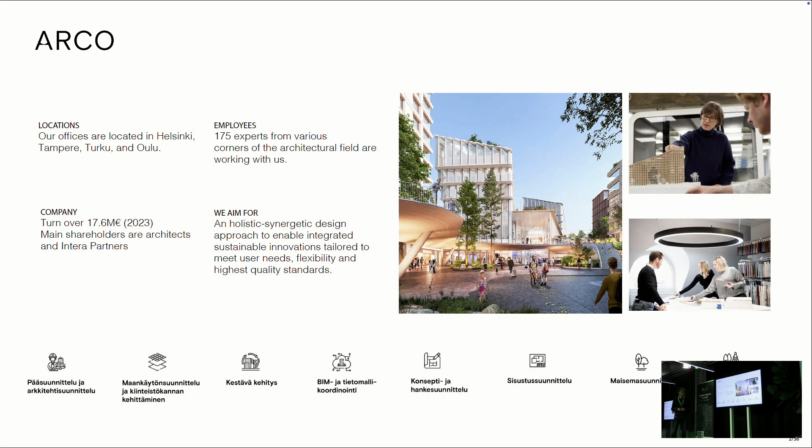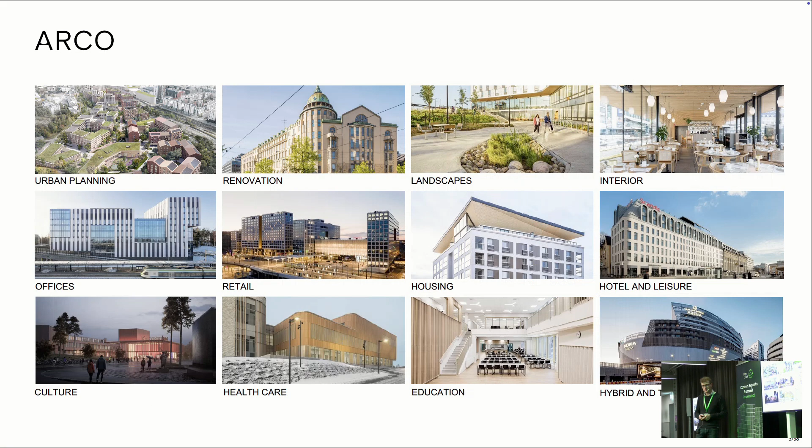I'm originally from Germany, that's why I'm sorry for not yet being so great at standing here doing the speech in Finnish. But I'm leading the sustainability development team at ARCO, and also the international division. If you see the project range the company is doing, there's hardly anything left out. Because of that, if you're so large and handling so many cases, you should also be quite responsible, and you should turn maybe faster than a small firm can to all these new demands we have on the table today.

We know that the construction business is a huge emitter. We are using 50% of all the raw materials we excavate on the planet, that's quite a lot. And we are responsible for 35% of the waste put on the planet. So we should feel a little bit guilty.

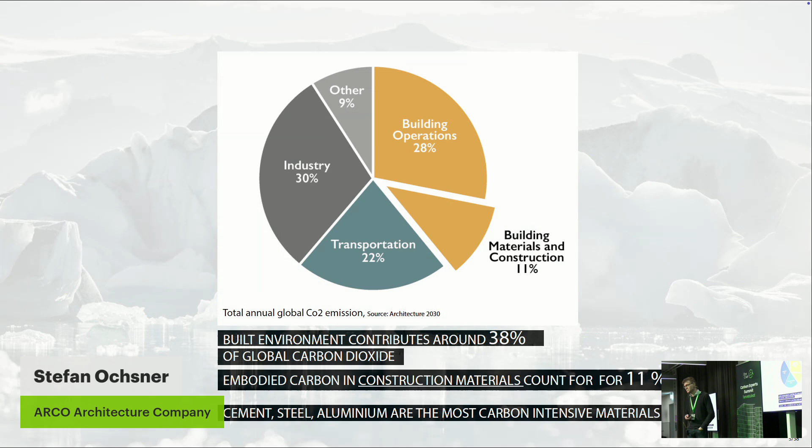But on the other hand, we have great opportunities to make things better. So we should understand where we are in the system, where we are in the problem-making things, and understand that we really have to move. We really can't wait anymore. And we can't let those frightening graphs we see on the screen grow anymore.

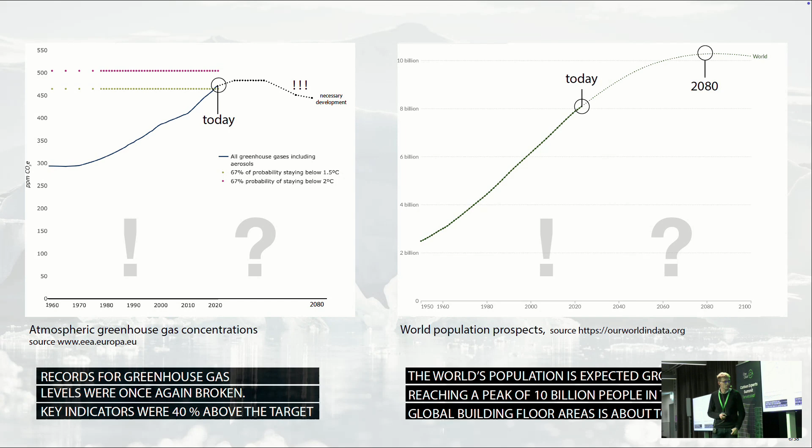So how can we actually do that? We know we have to construct more, we can't just stop building, but we also understand we can't continue as we have been doing until now. We know we can't emit the same way as we have been doing in the past. I'm a little bit naive probably, but I think the problem we have here is man-made, and therefore humans should also be the ones that can fix it.

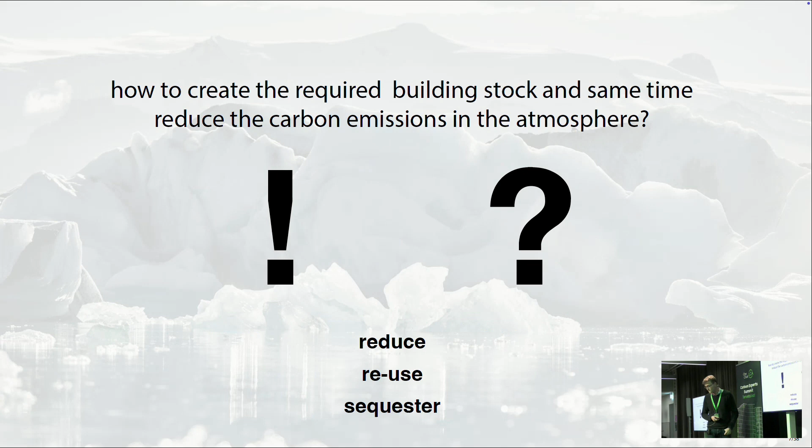And 3 terms down here on this slide show how we can fix it. I know it's not that simple, it's very complex, but in principle, you can fix it by reducing, reusing as much as you can, and sequestering - taking care that the carbon emitted doesn't reach the atmosphere.

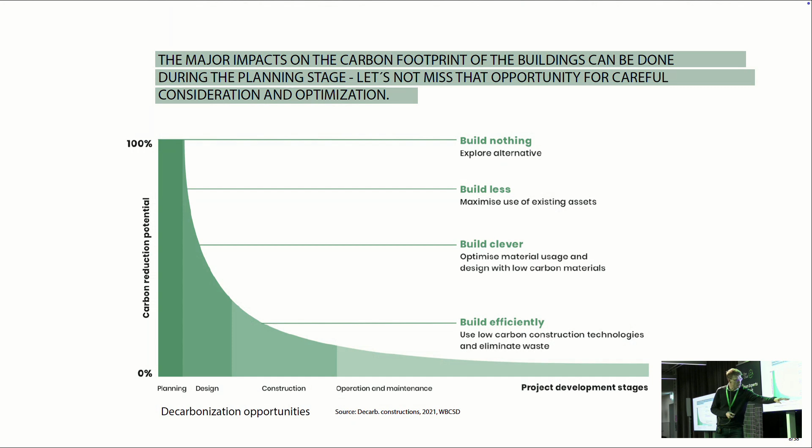Sounds easy, but it's not that easy. First of all, we have to understand where we can make the biggest impact, not going into depth. I know we don't have much time, but just want to point out, beginning of the project, very, very early, that's the place where the big change can be done, where you decide, do you actually build or you don't build? Do you use the existing stock, or do you build actually smaller than everybody's expecting? And only then, later on in the process, all this optimization, all the clever materials, all the technology can really make the difference.

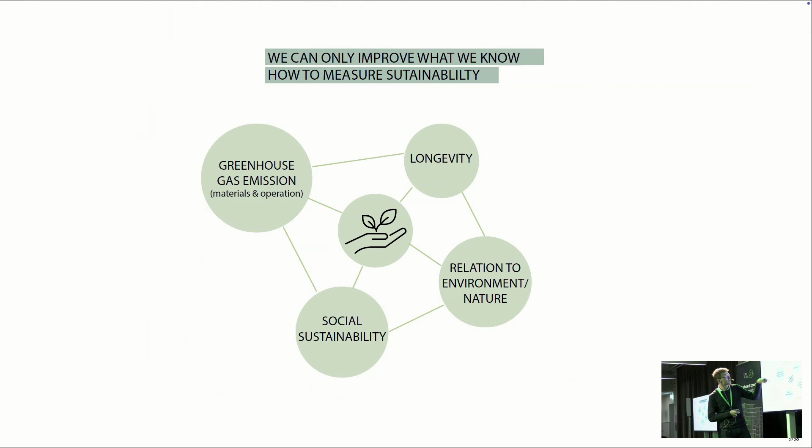At ARCO, we have been asking ourselves in the last years, when we were starting the sustainability group and we understood we have to do a little bit more than just the classical architecture, we wanted to specify ourselves what is really a sustainable project or a sustainable building. And today we have been discussing a lot about this big bubble here, the greenhouse gas emissions, material and operation, everything included, but we also need to remember that there is much more than that. It's about how long the building lasts, how the buildings are in relation to the nature, and how social sustainability can be understood, the relation between the society and the city and the buildings.

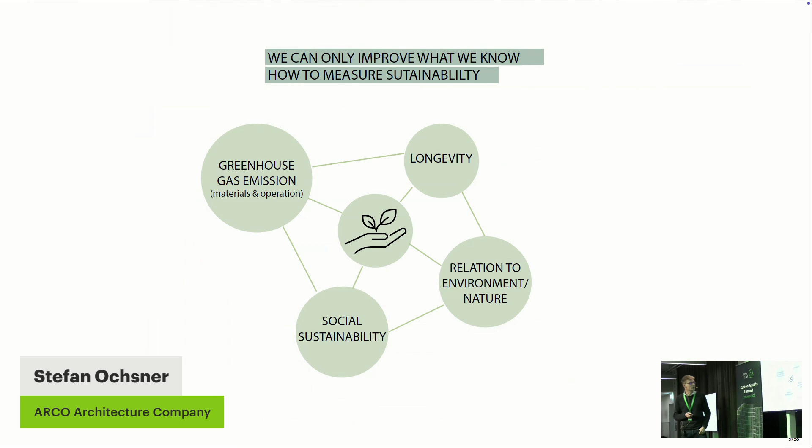But for me, this sentence is quite important. What we want to improve, we have to understand first, or we can only improve what we know. And that led the sustainability team in ARCO, which started pretty much in 2020, to the point where we are now. We have been doing a lot of collaboration with software developers. We have been doing a lot with One Click LCA, with other software and tools, of course. And we have been discussing with a lot of collaboration firms in order to be one day ready to really make sustainable buildings. And not only every 10th building should be like this, every building should be like that.

And since the title of the speech was how to change the design process, the method, I've been trying to collect here the ingredients we need for making things a bit more sustainable. And we think that there are 5 big ingredients. One is that also the architect has to be really active in steering the carbon emissions, meaning doing the calculations. Reuse and circularity has to be taught much, much more than it is today. Efficiency in terms of space use and in terms of energy is one thing. Biodiversity is the other thing. And then the last one, Panu mentioned it in the entrance talk already. Many things can be done in terms of checking our impact on the environment with analytical tools.

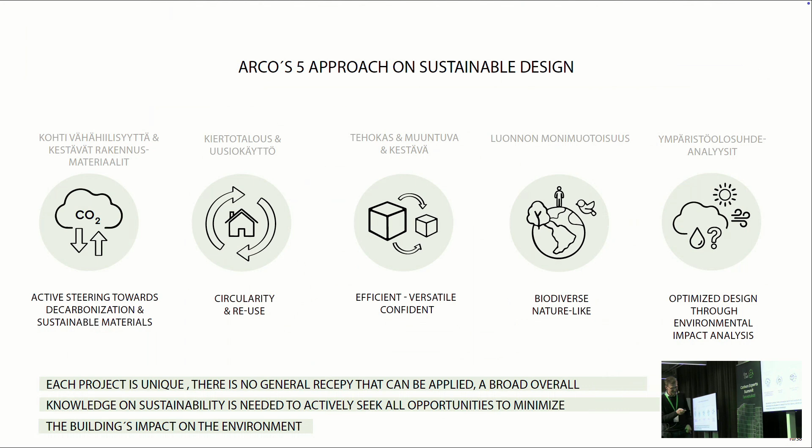Let's use them. I'm not going much into this theory. I have some slides that show buildings at the end. But let's go quickly through these 5 ingredients before I switch to explaining how these have been used at the building level. So what do I mean when I'm saying the architect should be active in steering towards decarbonization? I know we have special consultants and they can do the calculations probably more precisely than us. But we feel that if we are not understanding where the carbon is located in our buildings, we can't make them really better. We can't just always wait until somebody tells us what to do. We have to get the feeling ourselves.

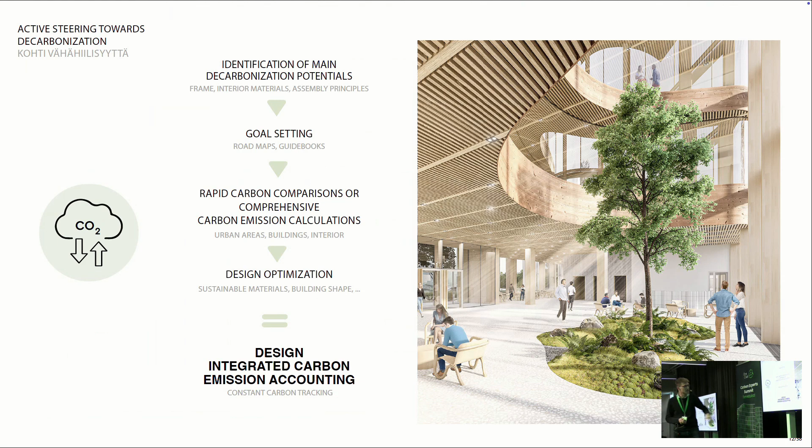So we want to sit at the table at the very beginning. We want to identify the decarbonization potentials with the clients and with the builders, make the guidebook, make the roadmap. And then I think this is maybe something I want to point out, especially: we think the right tool would be to make a lot of rapid carbon comparisons during the design phase, not only at the beginning and at the end, to have the entire design phase totally connected to carbon emission calculations. Whenever you have to make a design decision, you should know what it means. And therefore, we think that the architects have to be skilled to do the calculations, to get that integrated carbon emission accounting goal.

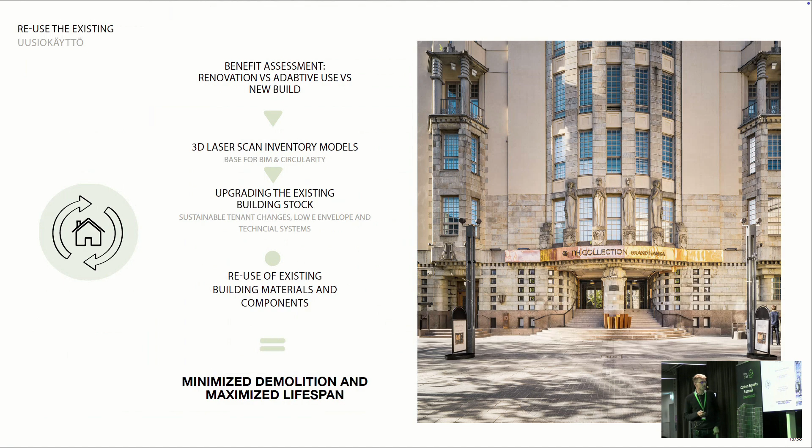Using the existing: of course, renovation will be on our schedule much more than it is today. A lot can be learned from these old buildings. A lot of new tools are needed to make these constructions more smooth, all with the motivation: let's minimize the demolition to the absolute and maximize the lifespan of the buildings.

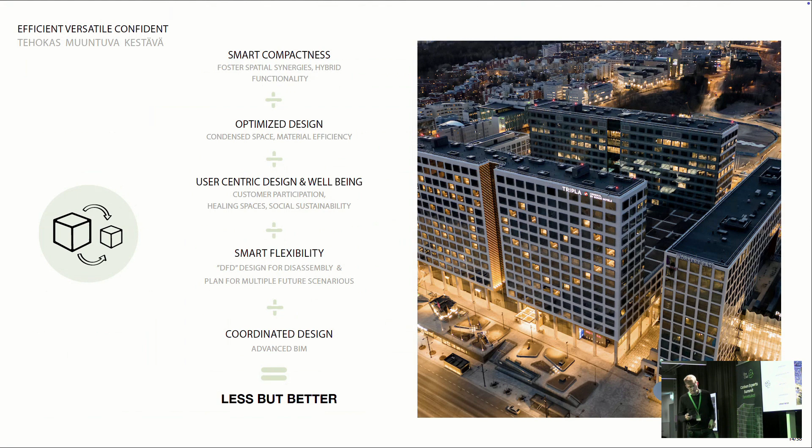This one is maybe my favorite, has also the most difficult title, efficient, versatile, confident, probably a little bit too much. But what I want to say is, let's try to create buildings that are smaller than they were in the past, but smarter than they were in the past. Let's try to put in a little bit more functionality, a little bit more flexibility, a little bit more optimized, and just let's build less but better and save carbon by that.

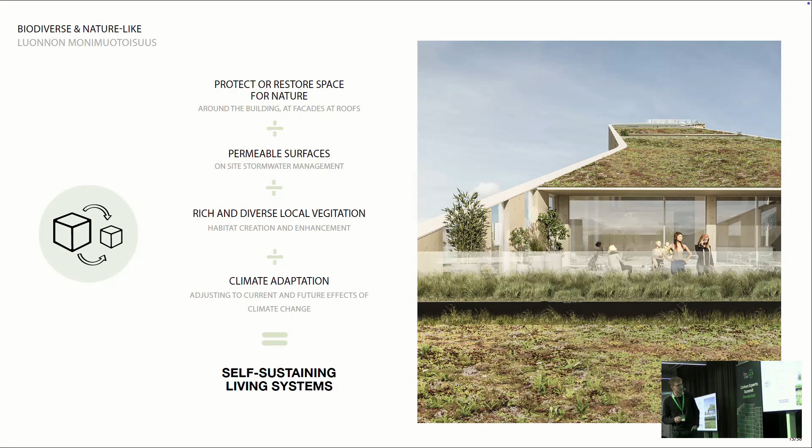When it comes to nature, we know, unfortunately, we are killing a lot of nature. We are killing a lot of biodiversity. Let's be much better on bringing that back when we put buildings on the ground. There will be more coming later.

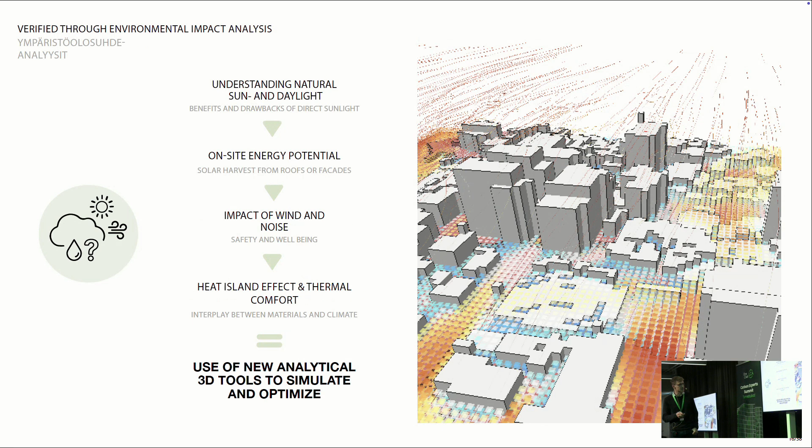And then the last ingredient is, let's not wait until the high-rise or the mid-rise comes up in the urban landscape. Let's check the impacts of it before. And that refers to thermal, wind, noise, humidity, anything can be almost simulated nowadays. And the architect should use those tools to be really sure that what they do has a positive impact and not a negative one. So let's do some examples, still good in time.

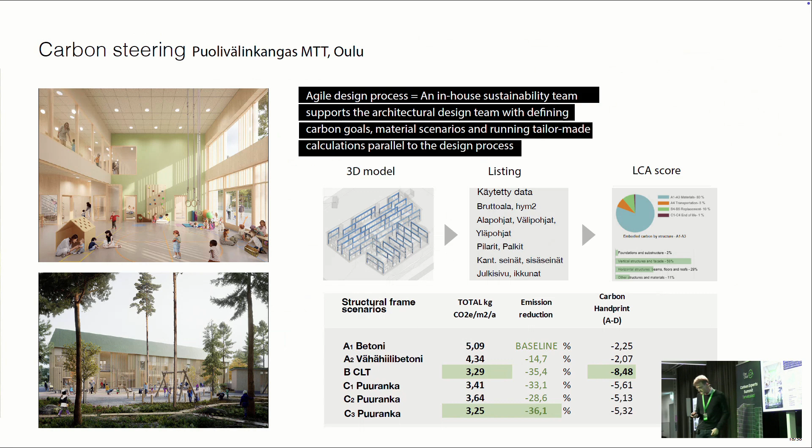I'm going in the same way through the ingredients, as first a few examples where we have been training ourselves to do carbon steering in the past, and then I'm going through every one of the 5 ingredients and show you some examples. So carbon steering starts in the architectural office very often when you do a competition. We have now set up the workflow in ARCO like this, that the sustainability team will support the competition teams very, very often, and we help them to build up scenarios, options, and do the baseline calculation and find out what kind of decarbonization level you can reach with certain solutions. And this is the start of the project.

That was an Oulu competition. This is the end of the project. This is Lyyra in Helsinki. Maybe some of you know that new building quarter close to Hakaniemi. And there we were trying, can we actually, as the architect who is managing a lot of data on a BIM level, on an IFC level, can we do similar things for the emissions?

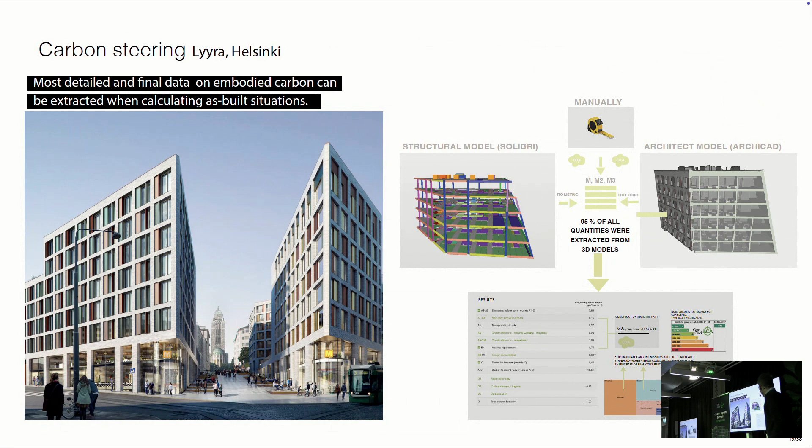Can we pull in the information from the structural model, from the architectural model, from the manufacturing side, from the client, and do the as-built calculation? We were training and checking how much time, how much effort, what kind of workflow has to be built up for one part of the Lyyra project, for the housing part. And we managed to get 95% of all the quantities from the 3D information and using One Click LCA, as in almost all our projects.

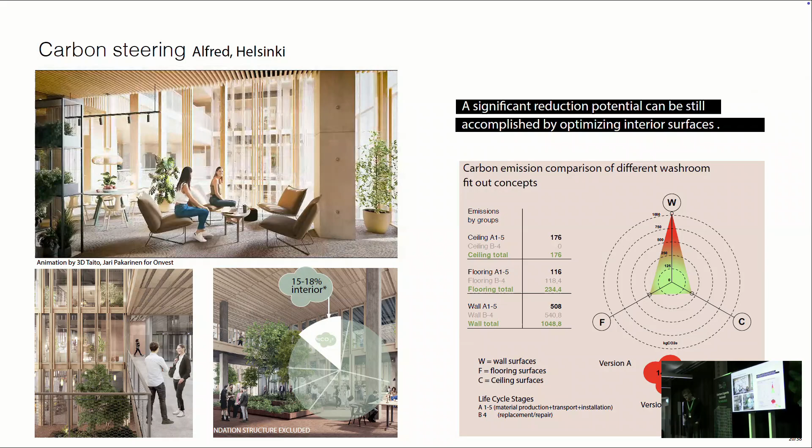This is a project that shows the reality quite well. It's a very ambitious client. We are building an office building in Vallila at the moment, but the decision on what kind of structural frame is used is very often pushed really far in the process. So we didn't want to give up doing decarbonization strategies just because we know that the biggest emitter, the frame, isn't decided. So we were going down in the hierarchy list, and we noticed that the interior surfaces in such an office building would count 15 to 18%, foundations not included in that calculation.

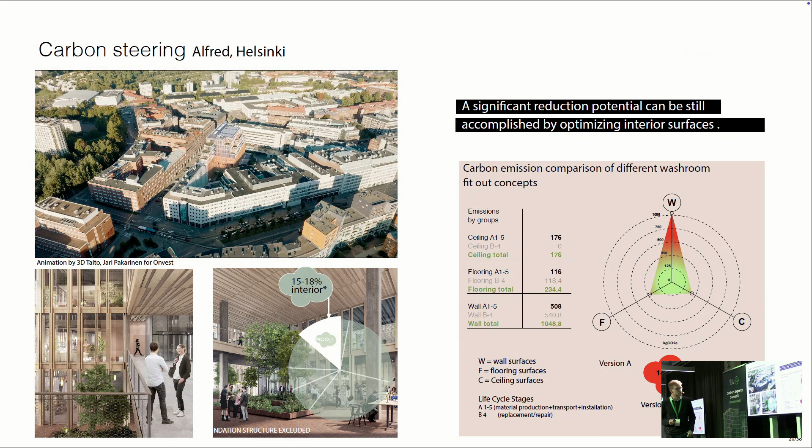And then together with the interior architects, we were doing different versions of customer spaces, toilet spaces, looking at floors, walls, and ceiling, and you see the cloud of the emissions, how much you can push it down if you try hard, and you can still have a very interesting interior design.

How do we do that? Probably as many of you who are doing the calculations, we're using One Click LCA in the center. We're using ArchiCAD, Revit, Solibri to feed in the data. We're using the rule sets. Very grateful that One Click LCA offers that all. We're using the EPDs or the generic ones that come from the One Click LCA database.

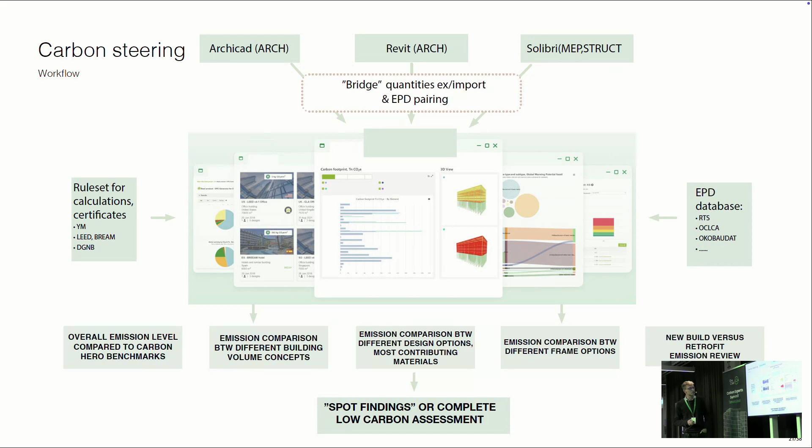And we can do actually quite many different small calculations or comprehensive ones, comparing different building volumes, comparing the frames, comparing material setups, facades, slab systems by ourselves, and trying to get the feeling how well the building behaves in terms of emissions, or how stupid decisions we sometimes make just because we like very much how it looks.

If I go to the second ingredient, mastering the circularity, it's a little bit a different approach than what we heard in the Tampere case. I'm not going into using the tiny bits of materials, but we think that we are lucky that we can learn from these great historical buildings.

We have been renovating these 3 hotels in Helsinki, and we have to really get ready for the future where in 2040, probably 2/3 of all the building stock is already there. And we can now learn from these lighthouses, because in the future we have to be much more creative, because they will not always be so interesting, the buildings that will be renovated.

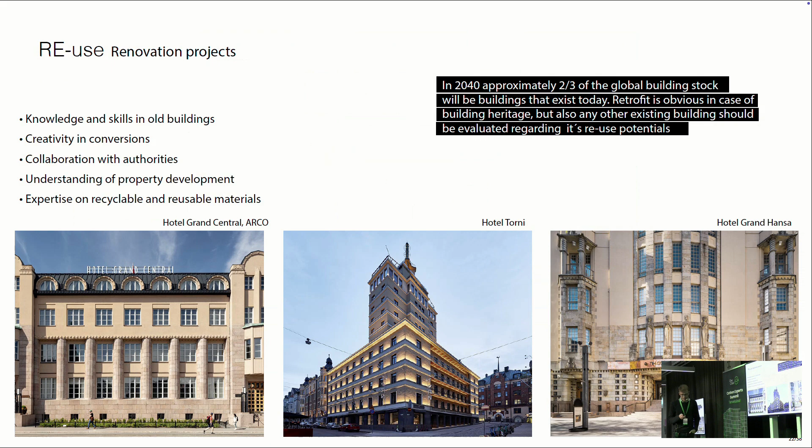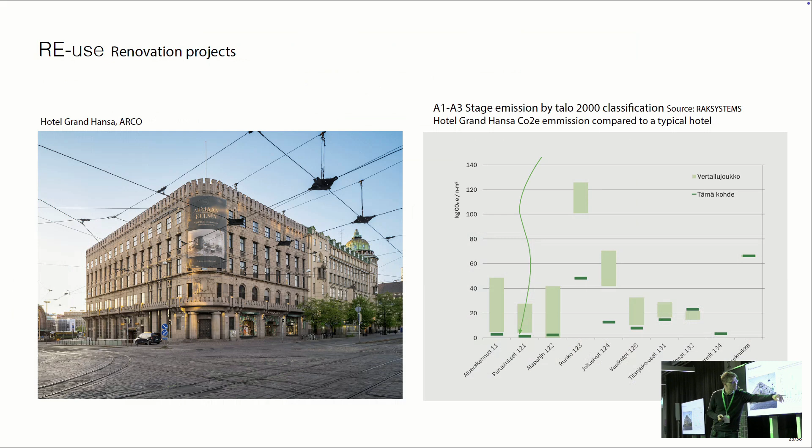We know that the emissions are always much lower. This is not a calculation from us. It has been done by the sustainability consultant, but everybody knows that in the emission level, there is no way that you can beat a reuse project versus a new project.

An interesting project from Doha, where the client was asking us to do a comparison between demolishing an existing high-rise, which was not very successful, was actually never taken into use, or can we actually do something to it to give it a new skin? Together with Ramboll, we were developing a system adding a belt around the existing core, creating a new shape and creating a new functionality of the building.

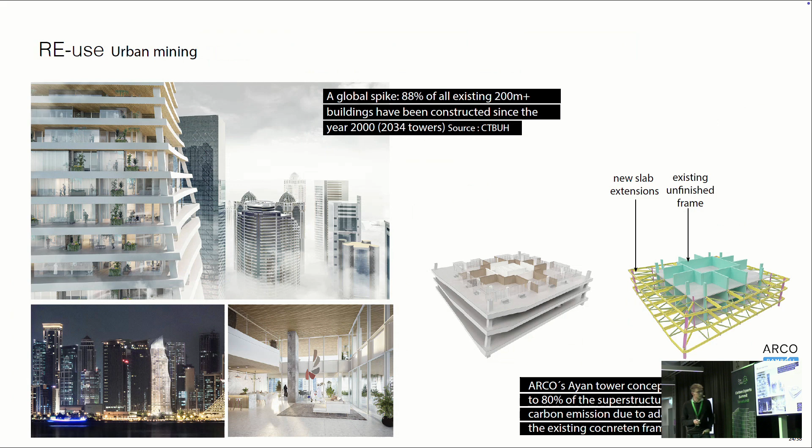And this type of urban mining is just one example to use the materials that you have available in the city already. 80% saving according to some preliminary calculations. The motivation that a building will be demolished or not is not always on the architectural side, but I think if we have fantastic tools available, and we do have them available, we can still motivate many clients to take the step and to renovate rather than to demolish too early.

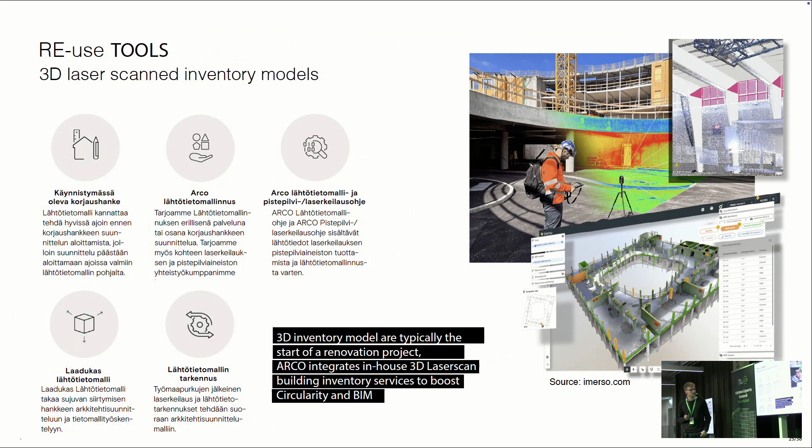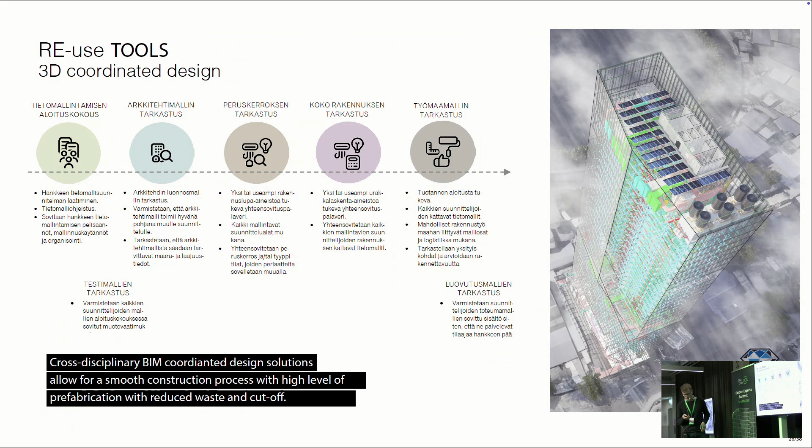Nowadays, we're doing in-house 3D laser scan and photography inventory models ourselves and kicking in the BIM level already at a very early stage. We all know that BIM has a lot of sustainability benefits, less waste, less mistakes, much better collaboration. So let's use it also in the reuse projects very early on, and that inventory model is one of the important things.

The efficiency and the versatility. Is it possible to build the same as what you have been building before on a smaller footprint? Is it possible to meet a demand from a client to increase by 1,100 students or 18% without building new? Our Tampere and Turku ARCO branch has shown that it's possible with a very different design method, with a very participatory design process. A lot of data collection has been done, a lot of client communication or user-centric communication has been done, and many of these campus projects actually survive without adding new functions, just by finding new synergies between the different functionalities.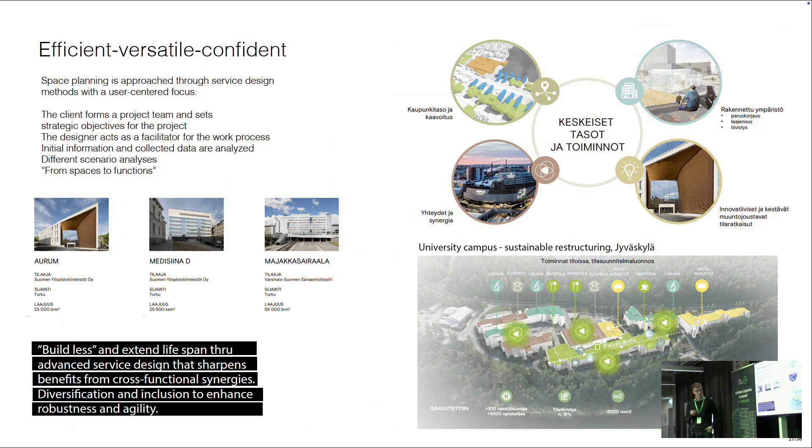And things like this can also be used for new constructions, just to be much more smart in terms of operation and much more space efficient. We believe that in the future, new building typologies are needed. This is a parking house pilot that we've been doing together with Ramboll as well, and the parking house operator, where we were envisioning to build now a 5-story parking house, which we all know will not be needed in 10 years, maybe in 8 years, to that extent. So we wanted to plan it already from the beginning for multiple scenarios.

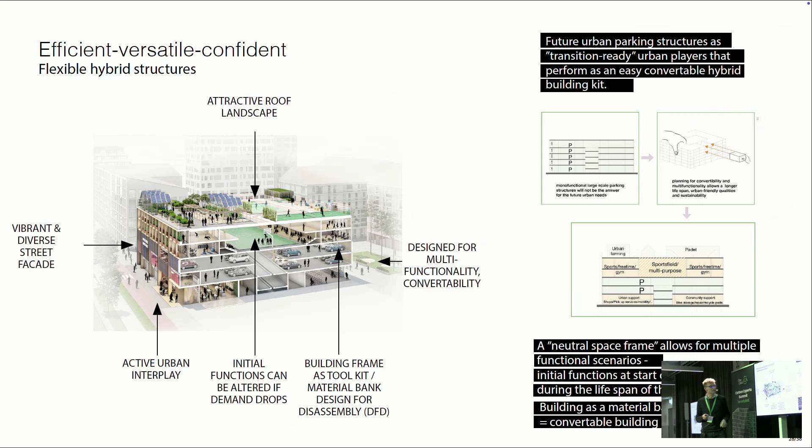And I think that is a kind of exemplary case for many other building typologies. I think we should never plan anymore just for one function. We should assume changes to come, and the building should be ready for that. And in this building, we have been envisioning changing part of the parking floors to sports facilities, to housing, to community spaces, and seeing the building really as a toolbox, as a material bank, and trying to develop together with Ramboll the connections in the structural elements to be reversible, agile, so that the building would last longer than 50 years.

In the housing sector, we all know this is all done. You don't make a floor plan anymore that is only good for one scenario. And also in the facade design, this is a facade of Tripla in Pasila. The design for disassembly, easy maintenance, easy changing in the background should be considered.

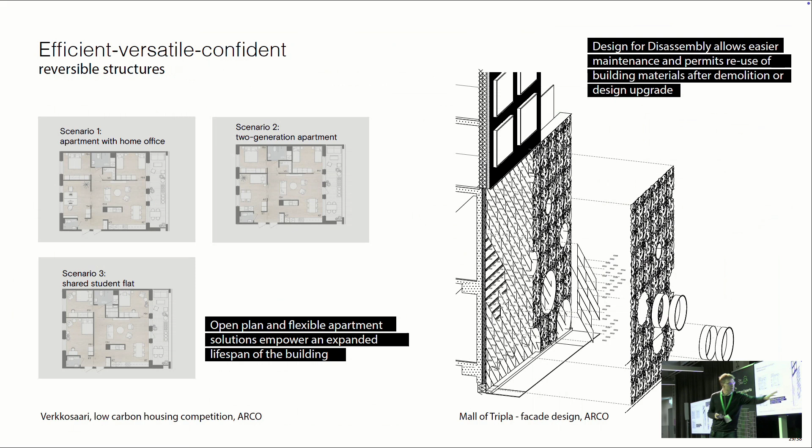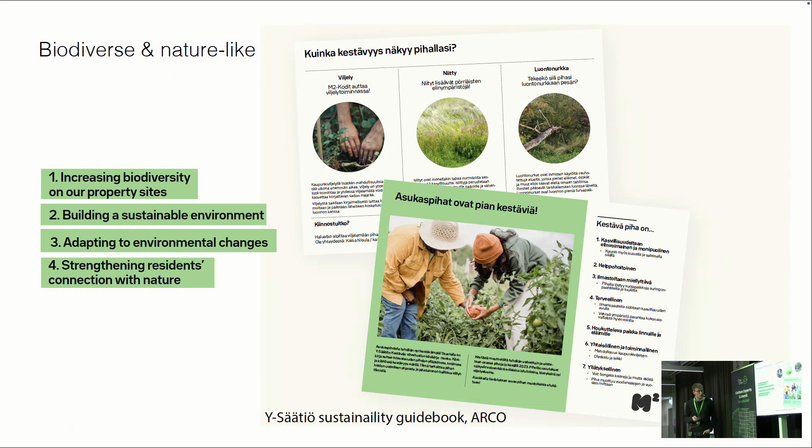The big potential in these big firms like ARCO is that you have a lot of experts in-house, which you don't always have. So we have landscape architects and ecologists in our office, and we're trying to boost this biodiversity, learn from them, work together with them on many projects, and create these kinds of sustainability guidebooks for tenants or for clients, in this case Y-Säätiö, more and more, and promote the idea that we really need living systems. We don't need artificial green spaces.

We need living systems like real nature, and we have to bring back as much as possible of them to our sites. And the courtyards are not enough. We have to go on the roofs, on the facades, and have to use every single surface we find to bring enough biodiversity back.

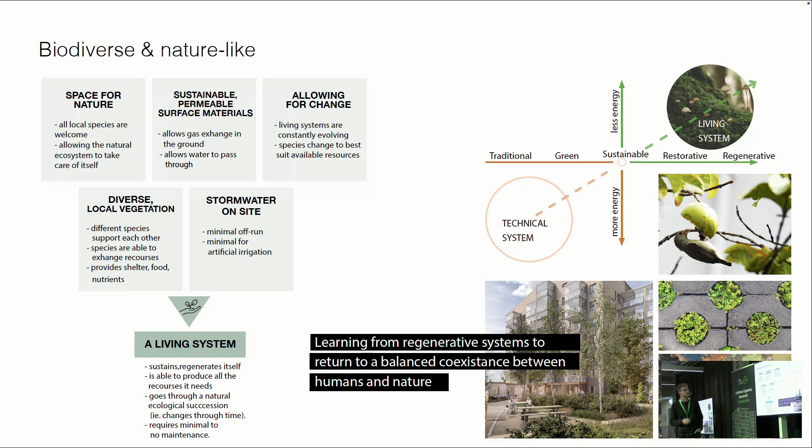The last ingredient is the environmental analysis. And as we saw already in the announcement, One Click LCA is now joined with ENVI-met. This is one example of this. We started using environmental analysis with different software early on. I think that project is already 5 years old. And it's a good example of how a building shape can actually be influenced by data or by environmental analysis results if you're open for it.

We have been developing many building volumes for that specific site in Malmi for student housing, and we ran all of these 10 totally different volume options through environmental analysis, checking the daylight in the courtyard, the daylight on the facade, the noise pollution, because it's in a really noisy spot.

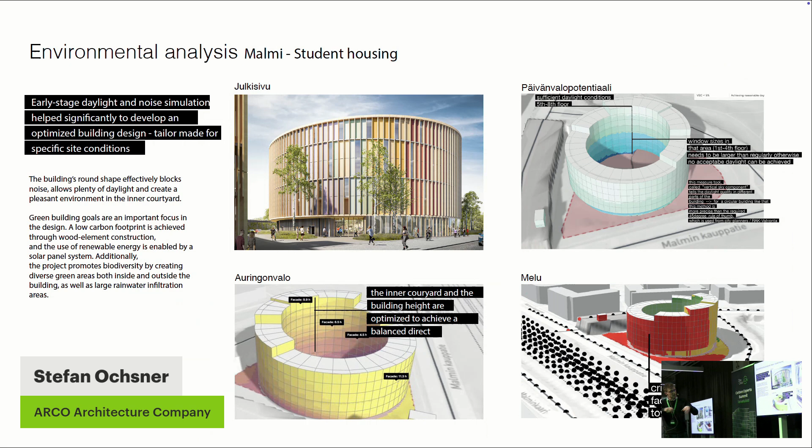And at the end, the winner of the analysis was a circular building where all the windows of the student homes face inwards towards the courtyard, which is wide enough and has a big opening to the sky. It has a sloping roof to catch more daylight, and it has these thick walls to block against the noise.

Similar tools were used to build in a very different climate region. This is Asia, this is Dhaka in Bangladesh. We are constructing at the moment a 138-meter tall high-rise there. And the client was very keen from the very beginning to have a lot of pocket gardens, a lot of green roofs, to bring a lot of green onto the building.

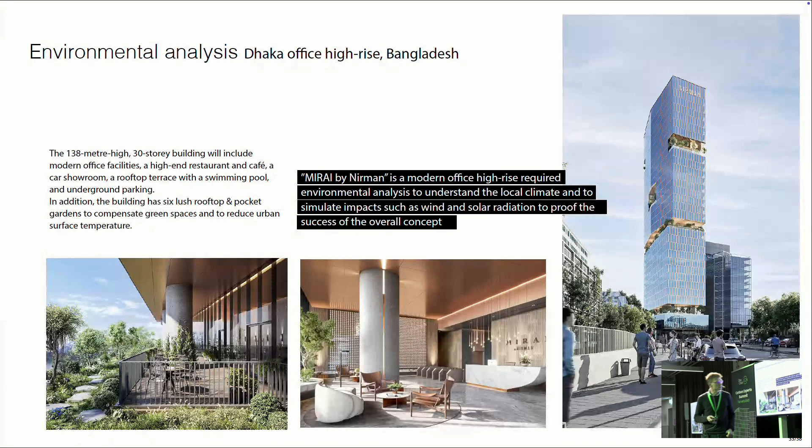And we wanted to be sure from day one that, first of all, the building aerodynamics work in a smart way, but also that all these spaces we create are not just decoration, that they're really safe to use and really comfortable to use. So with this environmental analysis, you can actually do that. You can forecast 20 years, 10 years. These buildings take quite long to build, and check the local microclimate. How comfortable will these spots be? Or will they be just a decorational add-on that is using carbon emissions but doesn't bring any benefits?

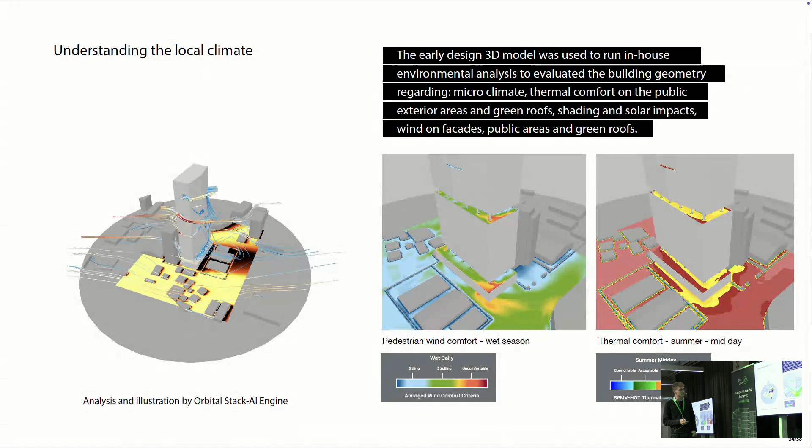This was done with a different software. Nowadays, we are heavily learning ENVI-met, which Panu was already promoting at the beginning of the session, which gives us much more insight, which is much more customizable, where you can decide if you want to work on a master plan level or zoom in to a tiny courtyard or an entrance area, and you can really simulate the thermal comfort, the wind, how well the plants will grow in that condition, how much of an impact a green wall or a green roof has on the microclimate.

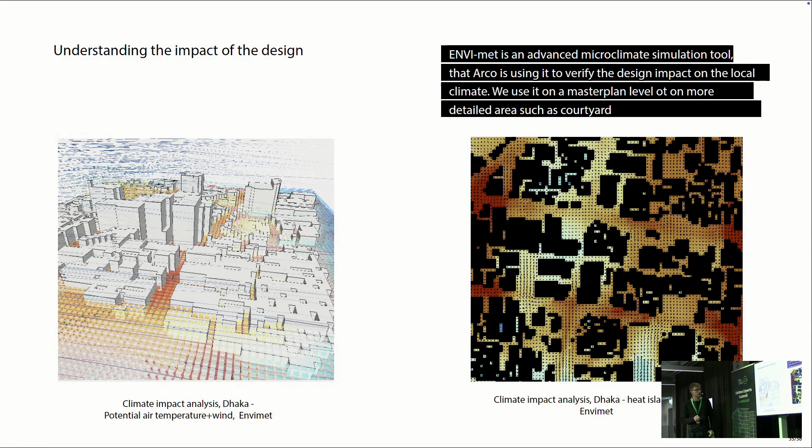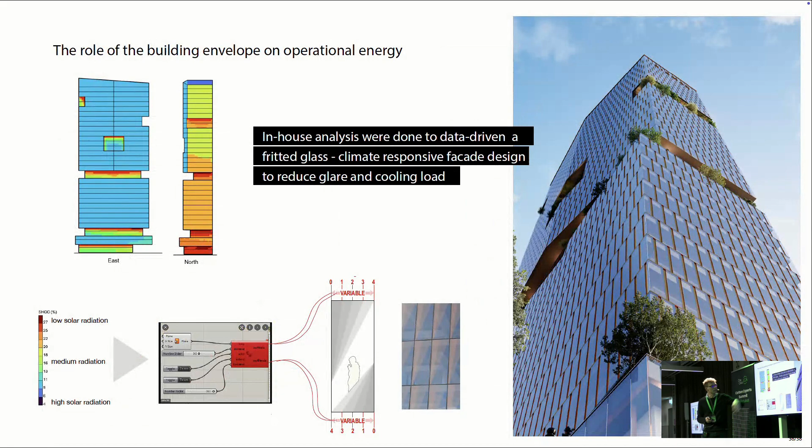And you have, let's say, the scientific proof of it. It's not just the feeling or the intuition of the architect, it's scientifically proven. So this is a huge motivation for us to check projects not only in hot climates like Bangladesh, but to use that also on the Finnish level. A lot of tools have been developed earlier for creating climate responsive facades, understanding the solar values on different parts of the facades, and then creating the right glazing for the right spots. And many more things should be done, but there are limits.

But the last slides I wanted to show you are of a project that is at the moment in construction, which combines a lot of these thoughts and a lot of these new ideas, new tools, widened processes, not thinking as the architect only about the stability, the function, and the beauty anymore, but widening the range of tasks we have. And this is Keilaniemi in Espoo. I think it's for sure Finland's tallest timber office building. When it was designed, it was also the tallest one in the Nordics.

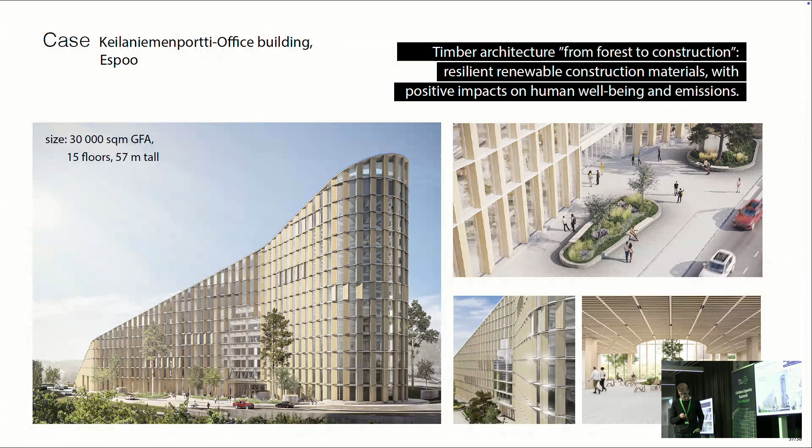Almost fully made out of renewable material, a lot of engineered wood in it, and collecting a lot of these ingredients I mentioned, which we think should be used for sustainable buildings, into one project. So it's a smart volume. It has been placed on a site next to a road, a very challenging site. Not many people thought you could actually create a building there. It's full of sustainable materials.

It has glulam columns. It has wooden slabs. It has concrete only on top of the slab. It has a lot of recycled materials in it. It's of course low energy, and it brings the nature back on the building and into the building in order to create a better connection between the human and the nature, and that will boost the well-being effect of all those workers in it, hopefully very much.

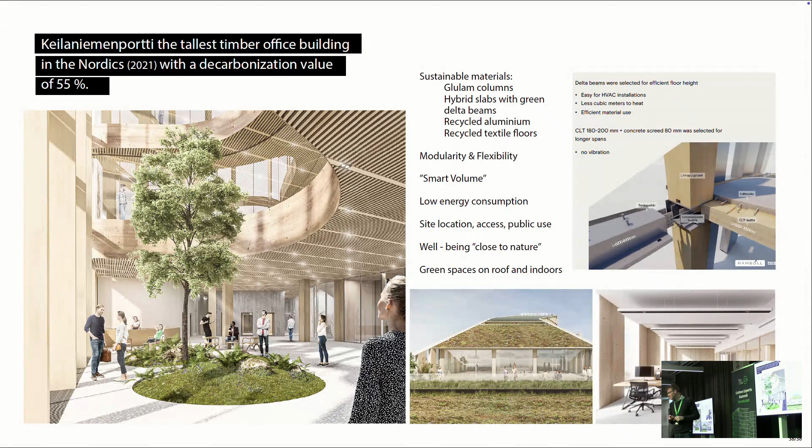And to have the chance in Finland to build so much with exposed wood and put it in the landscape of the metropolitan area, combined with the 55% reduction from the baseline, should be a big motivation for everybody to do more of that. So maybe I was running very much, but I'm glad that I made it through my slides, and happy to answer if you have questions.

Thank you, Stefan. You can stay here on the stage for a while. So, do we have any questions for Stefan at this point from the audience? Here.

Thank you, Miika Liukka from Olla Architecture, also here in Helsinki. The last timber building that you showed, I'm interested in the exposed wood surfaces. Were there any problems with fire regulations when having so much wood in the interior?

There are some special simulations done, and I'm also not fully sure how many walls can be really exposed, but it's a huge ratio. But since it's such a special building, and in Finland you're lucky that you don't need to follow the fire code one-to-one, once the simulation is done, and everything is of course sprinklered in the building anyway, you can apply for a lot of exceptions. Thanks. Yeah, I think it's very much up to the creativity of the fire consultant you have on board.

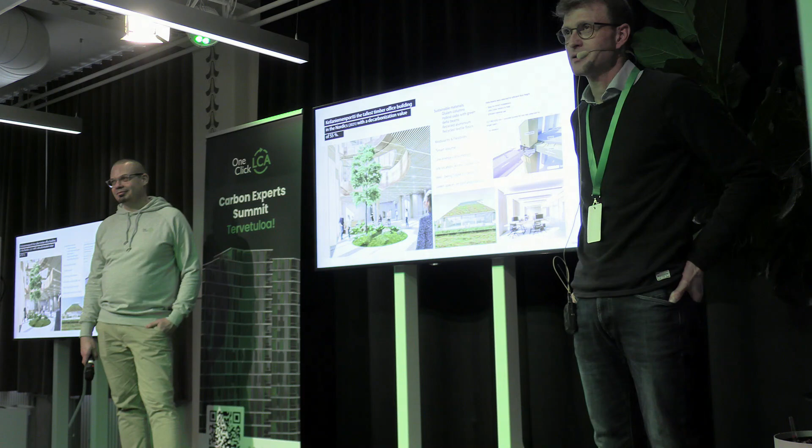Yeah, there are tools. They are not so straightforward as One Click LCA. I think it has a lot to do with the brain work that the architect has to do, and a lot to do with collaboration with the clients. I think you have to open up the perspective a little bit, and not think that this is now an office building and therefore it's 100% office use, to really bring in this mixed use and these kinds of synergies within a building.

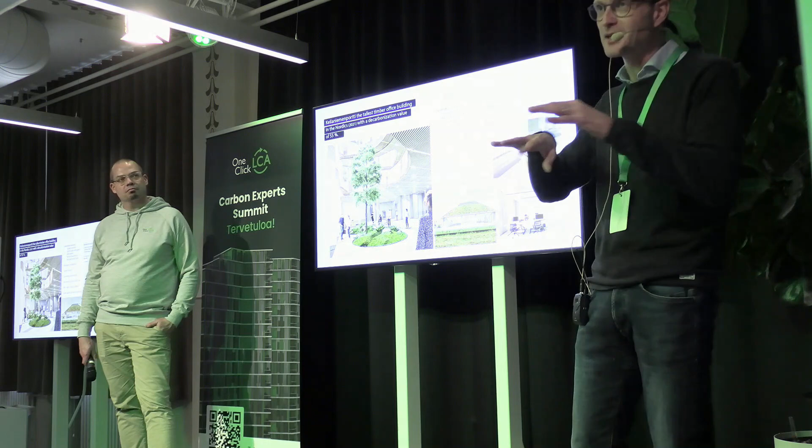I have the image of the mall of Tripla. Not saying that this is the most efficient building, but it shows a little bit this extreme hybrid. And I think if you had built all these functions that you have in Tripla spread over the city fabric, it couldn't be that efficient. But yes, there are special tools. There's a company called Delfoi. We are working quite heavily together, for example, in the healthcare sector, and they analyze the whole flow of goods or the whole flow of operation in the building.

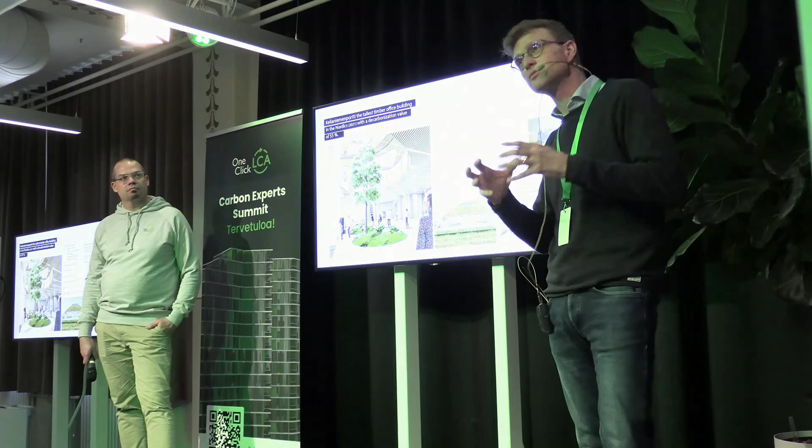And if architects start to be open to listening to many different partners and working together with firms that are maybe not directly related to architecture, then I think we can achieve this kind of shrinking of buildings, pushing them into a smaller frame, but still achieving a better quality on the inside. But yes, the tools are not that easy in this case. A lot of brain work and some specialists needed. All right. Anything else?

I guess no. I really like your perspective that whether we're different stakeholders in the value chain, we all actually need to step up and provide more service to our clients, because of course the clients don't always know what they want and what's possible. So it's our job to give those scenarios and those possibilities so that they can actually make those decisions.

Yes, and I think it's the best thing if you feel that you're in an urgent situation and you can gain a lot of motivation from it, that you're not getting depressed and not getting frustrated by the fact that we are in deep trouble, that you can push these negative thoughts into something creative and something positive. Good job. Thank you, Stefan.